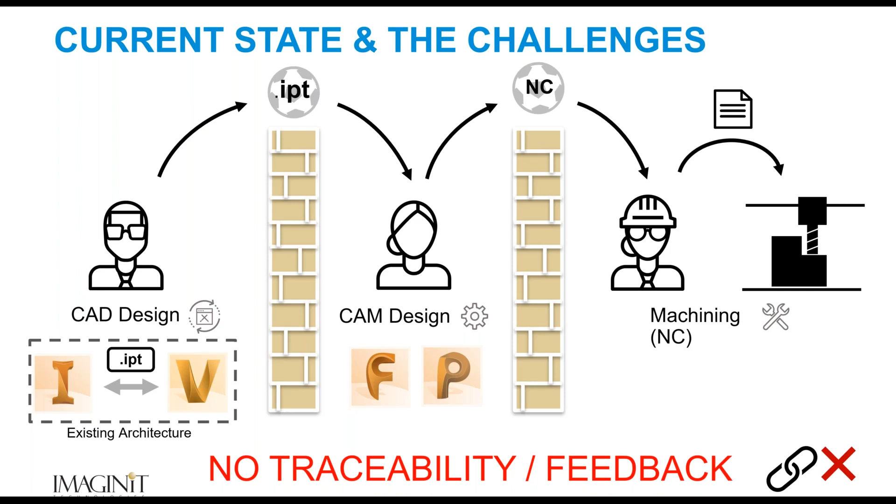What does this all cause? Since change is usually communicated manually in these environments, communication typically breaks down. Poor communication can lead to files not getting updated or being out of date for future work. It can increase costs related to rework, scrap, and wasted time. In other words, there's little to no feedback or traceability within the current workflow processes.

So what's the solution? A new plugin called Autodesk Vault for Make.

Vault on its own can remove the barriers or walls that separate departments. Any changes upstream can provide feedback and traceability to downstream stakeholders, and likewise, any downstream changes can provide feedback and traceability to upstream stakeholders, improving communications and allowing traceability and feedback to everyone involved in the workflow process.

So for instance, as a CAD designer releases the engineering model to be worked on by the CAM programmer, in Vault, its revision and lifecycle is controlled now. The CAM programmer can import the released model into FeatureCAM or PowerMill to set up the tooling and generate the toolpath and NC code, which can also be released to the shop floor for machining.

The shop floor machinist can use a standalone tool to retrieve the files from Vault and send directly to a machine controller, all while providing a tight feedback and file traceability within the Vault system itself.

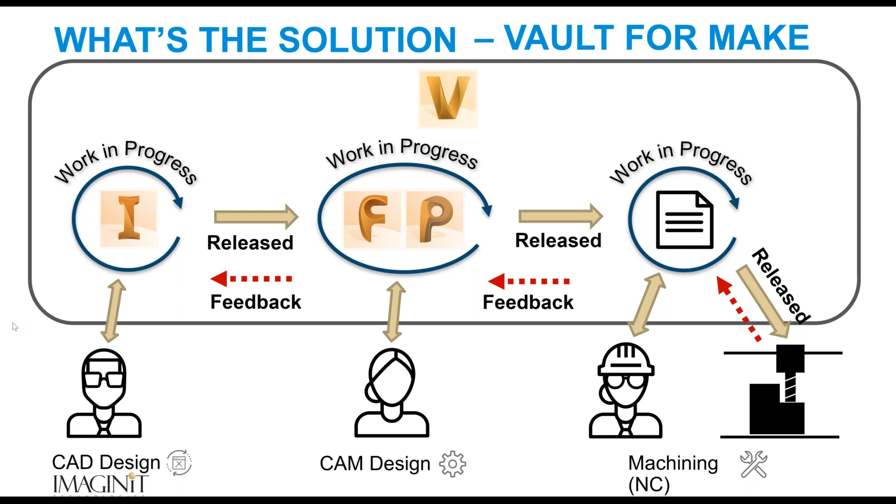So this is an example of a Vault Pro file workflow or a lifecycle definition and how it might relate to a design to manufacturing process. Again, this is just an example, but this example shows multiple file states and transitions over three phases of a workflow. So you have your CAD design phase, you have your CAM design phase, and you kind of have your production or your manufacturing phase in the process.

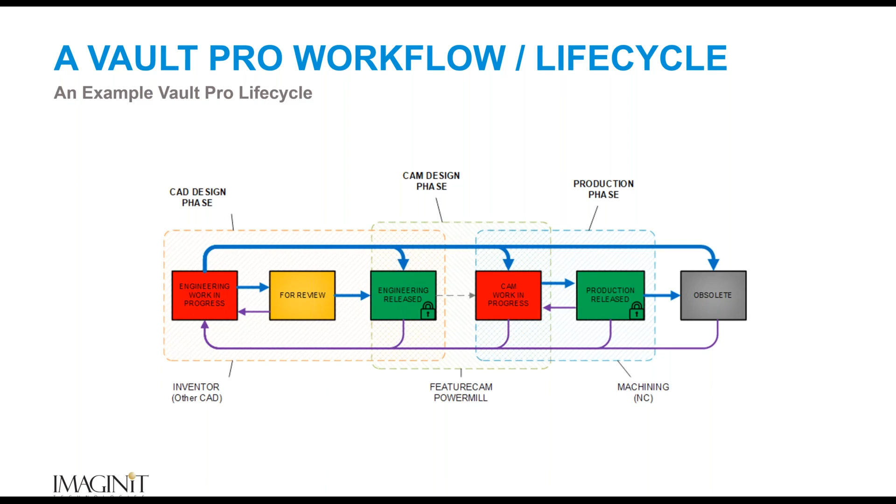So it shows which software or processes are being used in each phase, so you can kind of see the relationship of how Vault can interrelate between those different phases of the production and the workflow process. It's this process that allows us to control the feedback and the traceability needed, bringing the CAM project and manufacturing into the design and data management workflows.

So let's talk about a few of the primary customer benefits. We've kind of alluded to a few of these already, like traceability to the CAD files. In other words, we have links now. When files are checked into the Vault, there are links created between the CAD file and the CAM projects.

There's revision control on the CAM project files, the NC files, and the option files. Likewise, there's lifecycle states on the same CAM files as well, so now people can see when things are work in progress, they're in review, or they're released and ready to be manufactured.

Vault will also provide the interface for notifications and feedback so that you can always ensure that you have the latest status of the files that are in Vault.

A standalone shop floor application allows for the delivery of released NC code files to machine tools directly from Vault. And then ultimately, it's the centralizing of the storage and the relationships of the CAD, the CAM, and the shop floor processes that you'll benefit mostly from with the Vault for Make application.

So let's just talk about a few of the primary use cases here. So CAD file traceability - again, we've hit on all these a little bit already - but CAD file traceability means you can be sure you're using the latest CAD file during any of your processes, especially during the manufacturing process.

You'll have features like import from Vault to get your CAM project started with released Vault parts. Once your CAM project is completed, you can check them into Vault, and Vault will retain all the file relationships. If the CAD file changes or a new revision is released, you will be alerted of changes in the add-in. Then using the update to released feature, you can replace the model so you can calculate new toolpaths.

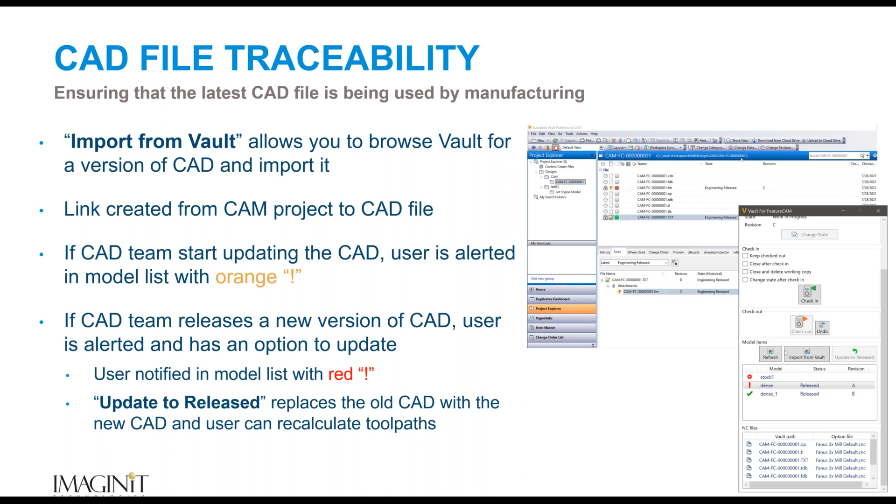NC code file traceability. Now you can automatically track the NC files created from your CAM projects in Vault. When you check in your CAM project, all related files, including the NC files, are checked in too. When a project is released in Vault, the NC files are released automatically as well, keeping your project in sync.

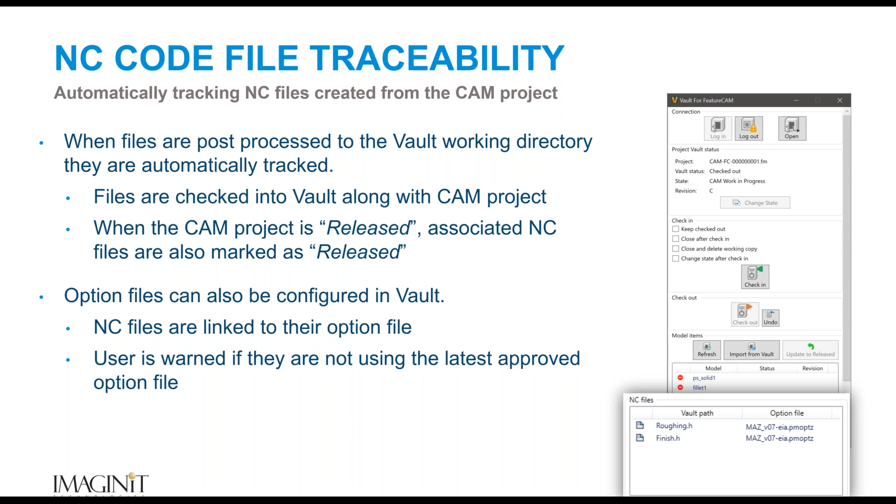And lastly, shop floor links to Vault. Now you can transfer NC files directly from Vault to machine controllers. There's a special standalone application, a special Vault client that you can run from, say, a machinist workstation, that allows them to search for and send NC files to the appropriate machines. This functionality works with all major controllers.

Visual notifications provide feedback to the operator, ensuring they have the latest files and know the status of those files. The operators can also check out, edit, check in, and release NC files from this client as well.

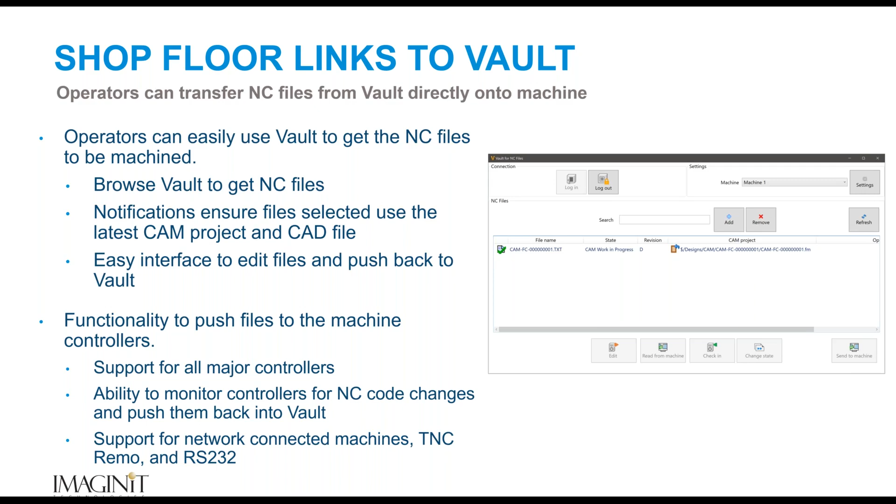Okay, so next, we'll show a demonstration of Vault for Make, covering these primary use cases and workflows. We'll be using FeatureCAM for this demonstration, but the interface and the functionality is basically the same for PowerMill. So Tim, I'll turn it over to you.

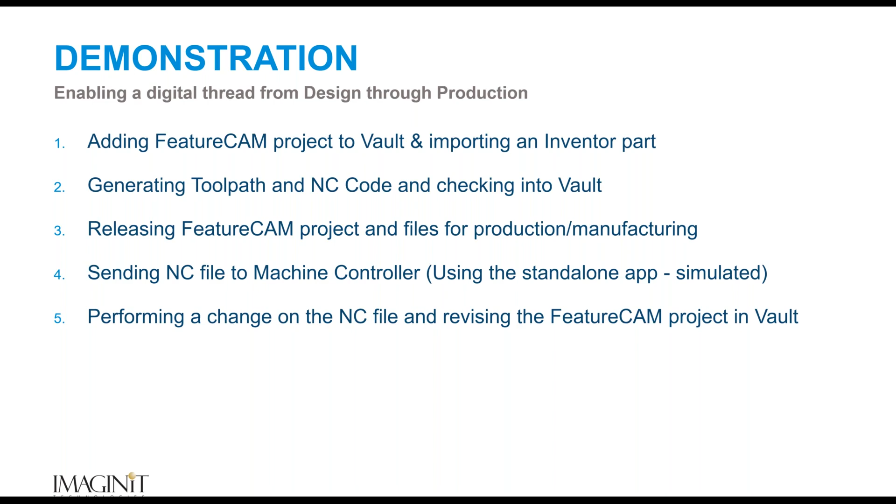Well, good afternoon, everyone. Here is the part that we're going to program today. This is in Autodesk Vault. File was created in Inventor, just a simple hub. It's got a hole pattern, a wrench flat, a few steps in here.

So we're going to jump over to FeatureCAM. And since this has both turning and milling operations on it, we're going to create a new turn mill project. And we'll skip through the first couple of dialogues here and get to the important stuff.

As John mentioned, we can import directly from Vault. We don't have to worry about that CAD engineer emailing us the file or slipping it to us on a memory stick, whatever the case may be. We can talk directly to Vault. You notice up here at the top, it shows my connection. I am actually logged into Vault from FeatureCAM.

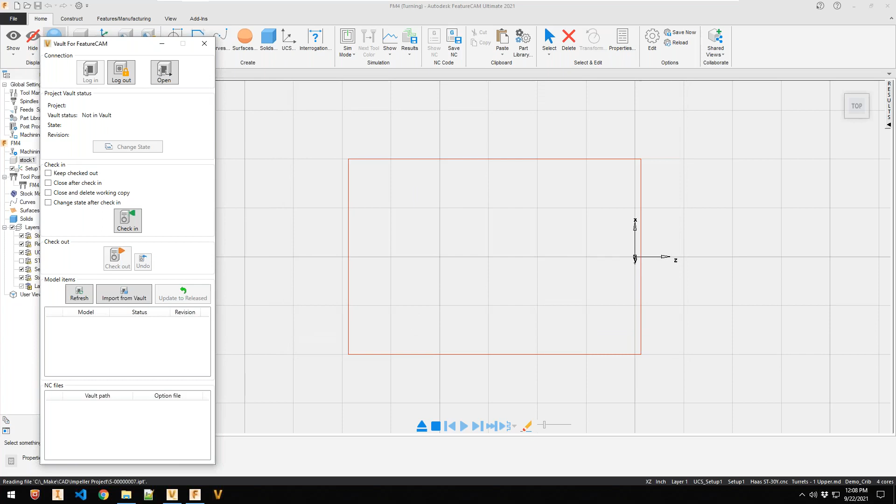So I choose my CAD file that I'm going to machine. And I might point out, it pops up, here's some of that feedback already. It says you imported a file from Vault. This file is released at revision A.

Had I chosen a file that was not released, the plugin would have warned me that the original design file would not be tracked, meaning that as a CAM programmer, I would not be notified if that part went under revision because I didn't reference the latest, greatest released revision.

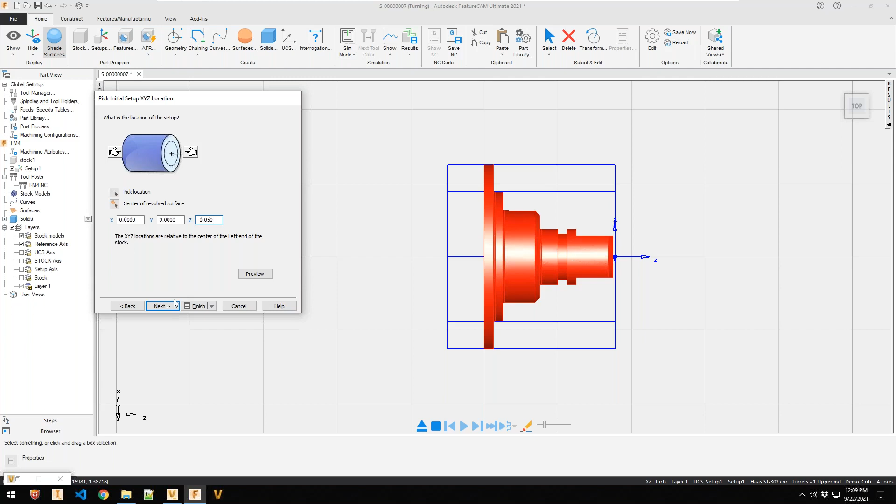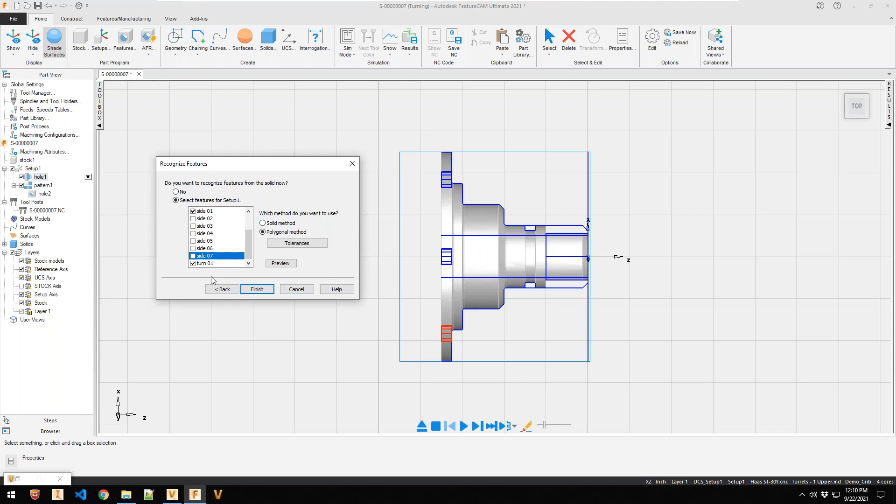So we'll go through here and quickly set up this part for tooling. Got to make a few changes. And make one final change here. Since we've already turned it down, we don't need the rough pass. So there I've got the basic setup to machine this part.

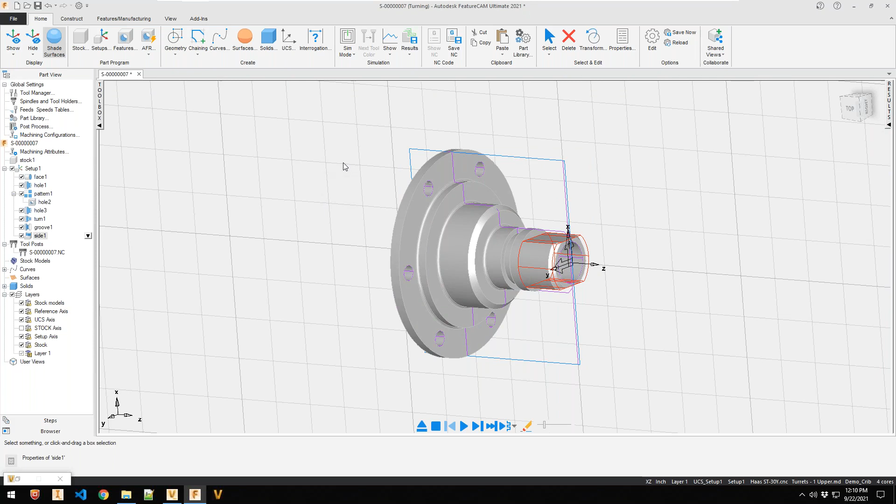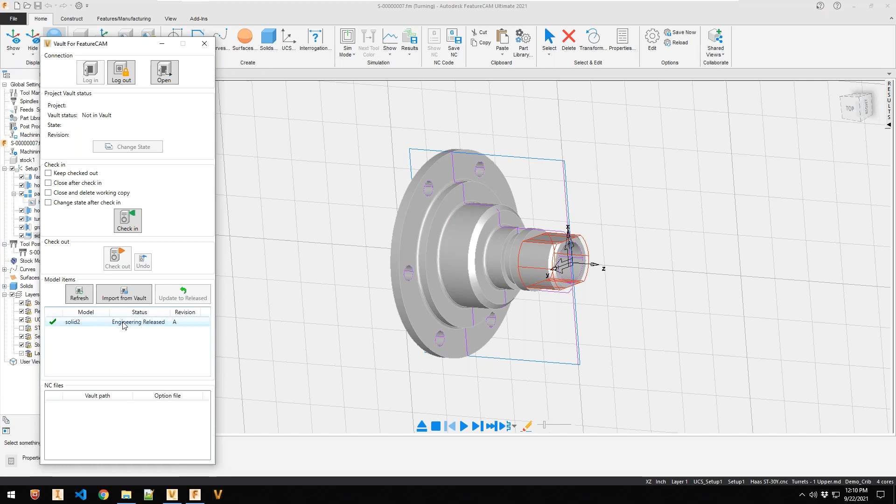So we're going to go ahead and save this part. It's going to save it to my local working directory. So we saved that project. Now, if I bring up that plugin again, we can see that, yep, we got the green check mark. It's fully recognized that solid. We're ready to go. So I'm going to go ahead and check this file into Vault. Check in that project. Tells me that, yep, everything's good to go.

Project is now read-only. And I'm also going to change the workflow state to CAM work in progress, because we're developing the NC code. So instead of an engineering work in progress, we've got a CAM work in progress. Now I'll check the file back out so that I can edit it again.

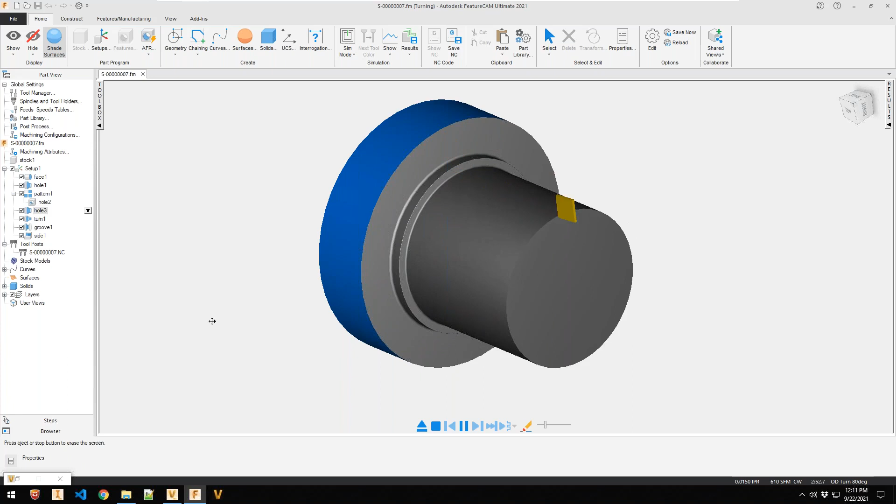This out of my way for just a second. So there's our part, just like we saw in Vault. And we'll run a quick simulation just to make sure that we got everything. Okay, everything looks good. I didn't see any collisions. I didn't see any tool holder crashes or anything.

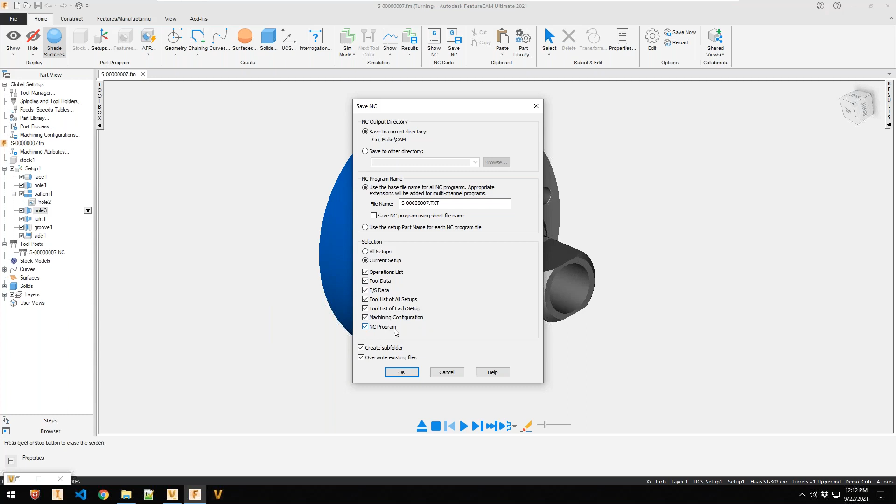So we're going to save that NC code that it generated. And this again is part of the plugin. The plugin, I should say, interacts with this. So we can choose all the different file types that FeatureCAM offers to be able to save off all of our tool data, all of the setup data, machine configurations, so on and so forth. Most importantly, our NC program down there at the bottom. So we'll go ahead and click OK.

And all of our files were saved again to our working folder. If I would take a look again at our plugin, now we can see down here at the bottom, here's all of those files. There's our option file that matched what I had set up over here originally in FeatureCAM.

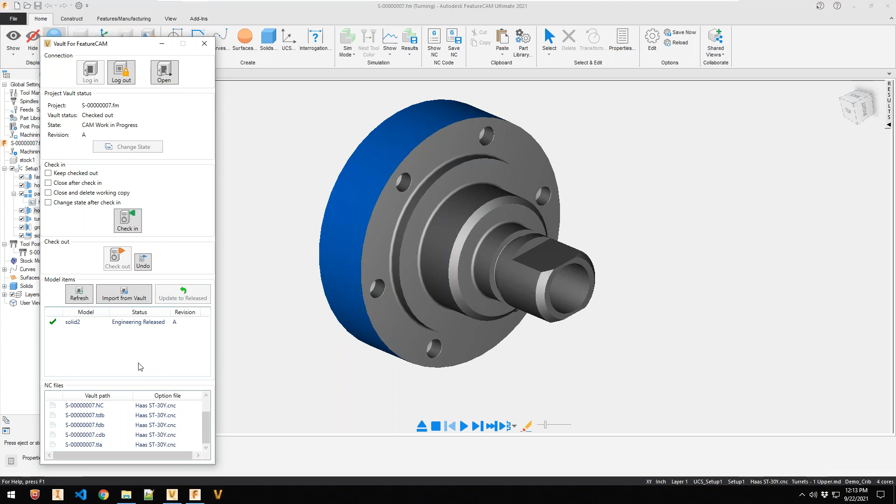So now it's time to, again, check in those files. This time it's plural because we're not only checking in the project, we're checking in all of the files that go along with it. And so since we're done programming, we'll change that state to manufacturing released.